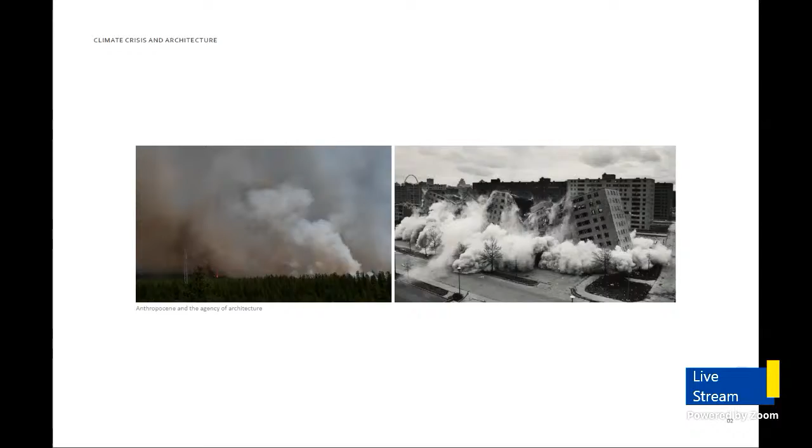The Anthropocene, as an acknowledged epoch, at last collectively identifies our responsibility towards the climate crisis. This thesis looks at architecture's complex relationship with nature, from romanticism, exploitation, separation, and energy conservation, to investigate the evolving human perception of nature and occupation of the natural world.

The 16th century development of Virgin American land by European settlers associated the city with a positive value. Nature represented the danger of the unknown, labeled as the chaotic wilderness. The following Age of Enlightenment characterized the rise of modern science, emphasizing the individual. It viewed the entire universe as a mechanism, resulting in the rise of capitalist globalization. At this time, nature was regarded as secondary, developing an exploitive relationship with it.

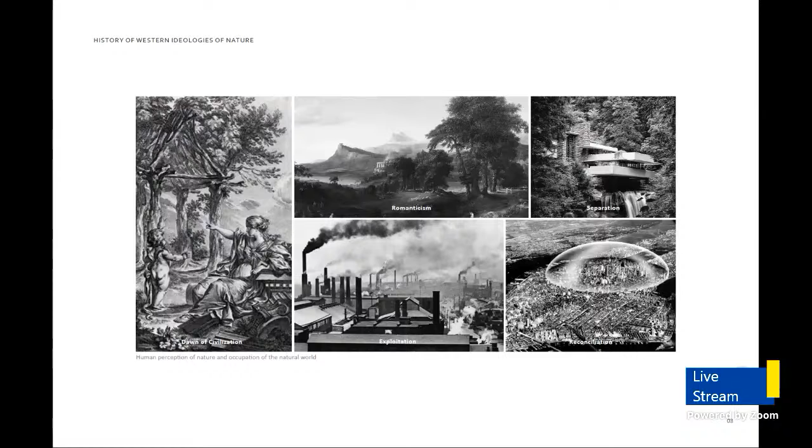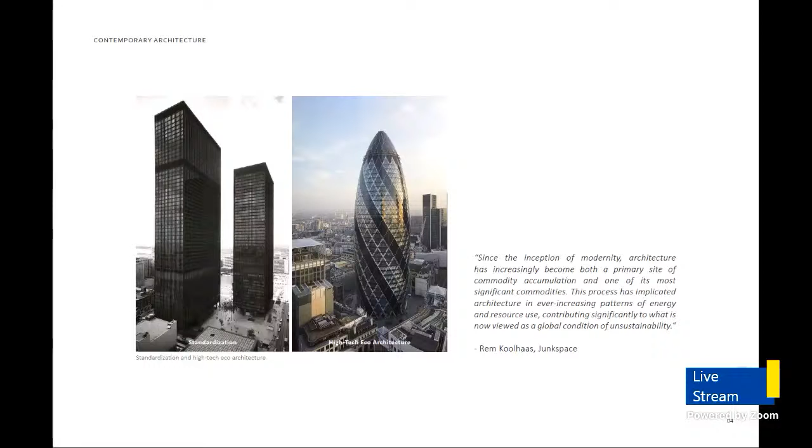In the 20th century, buildings became standardized and furthered the human separation from the natural environment by relying on mechanical systems and losing connection to nature-based concepts and local building practices. After the 1970s oil embargo, architecture shifted focus to the current discourse of sustainability based on performance energy. And while such buildings achieved performance energy reductions, their significant embodied carbon and use of high-end products makes them exclusive and unrealizable in the larger market.

In the 1970s, scientist James Lovelock proposed the revolutionary Gaia Hypothesis that viewed Earth and its biological systems as a huge single entity. The theory proposed a new way of understanding ecology, sparking conversations on coexistence with nature. Later, philosopher and environmentalist Timothy Morton defined the ecological thought as collective thinking, forcing us to invent ways of being together that don't depend on self-interest.

Researcher Kiel Moe brings this topic to the scale of architecture, stating that the act of building has influence beyond its physical boundaries, having social, political, and ecological ties elsewhere. As building impacts are vastly greater than performance energy, a hyper-ecological approach makes the energy and social exchanges an inherent consideration to achieve an ecologically ambitious approach to architecture.

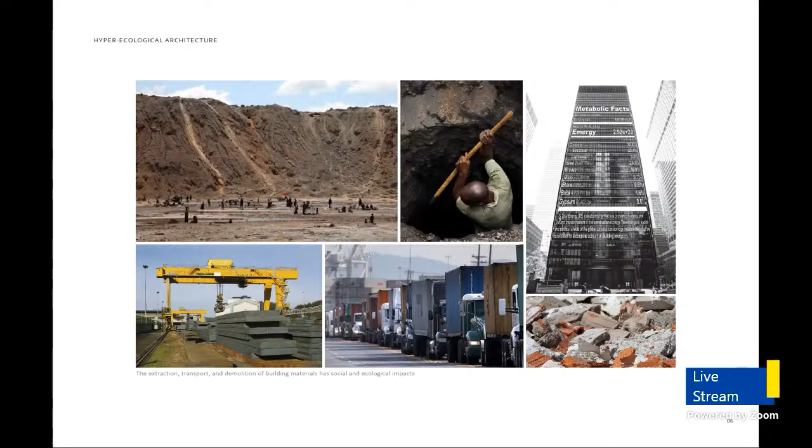The following case studies explore the interlinked energy and social exchanges through a blurred human-nature boundary of separation, the preservation of existing built structures, and considering the entire material life cycle. Through social exchanges, architecture has the ability to increase compassion towards the natural environment and generate a sense of interconnectedness through immersive experiences.

The Highline and OMA's proposal for Downsview Park create a social and cultural link between the public and ecology, embedding ecological topics into the urban fabric. Both projects also reclaim public lands through open and adaptable design, providing freedom of movement for both entities and encouraging engagement between the two within the urban context.

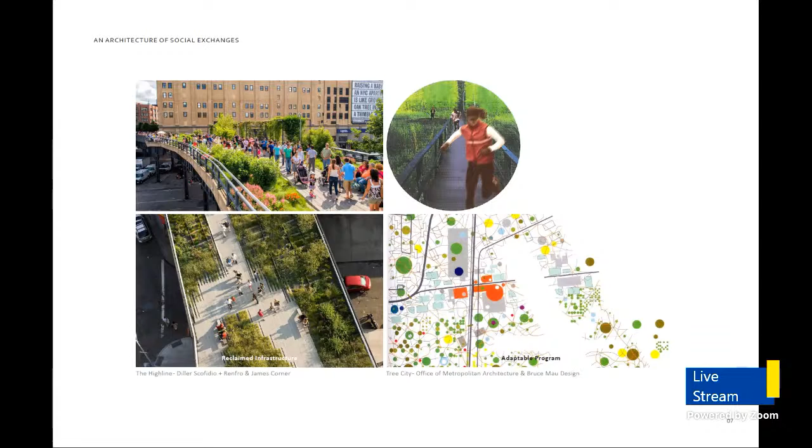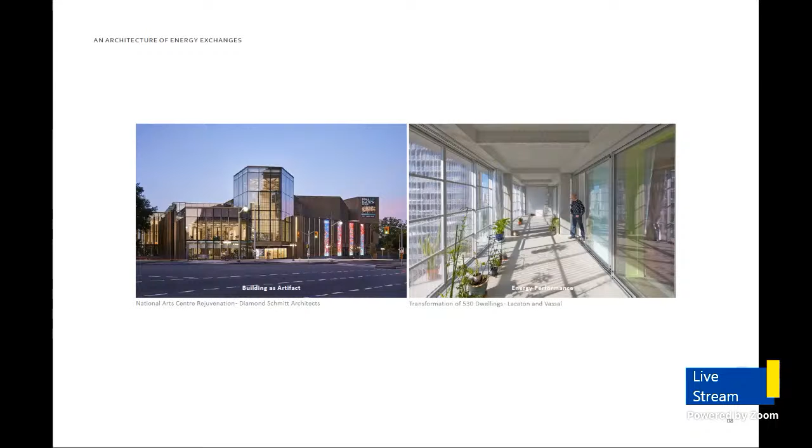A holistic understanding of energy exchanges views the built infrastructure as a material artifact open to adaptation. Through a layered intervention, the transformation of 530 dwellings by Lacaton and Vassal improves the comfort and energy performance of an existing building. The revitalization of the National Arts Center updates the building and reorients it to pedestrians and its neighborhood context. The projects exemplify how minimal interventions can radically change the usability and performance of an existing structure.

Energy exchanges also considers the life cycle of building materials and carbon sequestering biomaterials. The urban mining and recycling unit's design is formulated around the idea of temporary borrowing, using ethical materials that can be recycled, reused, or repurposed. Similarly, Stock Orchard Street House embraces low energy, easily accessible materials. These projects make energy exchanges an inherent consideration in the design, establishing an aesthetic by taking a moral standpoint.

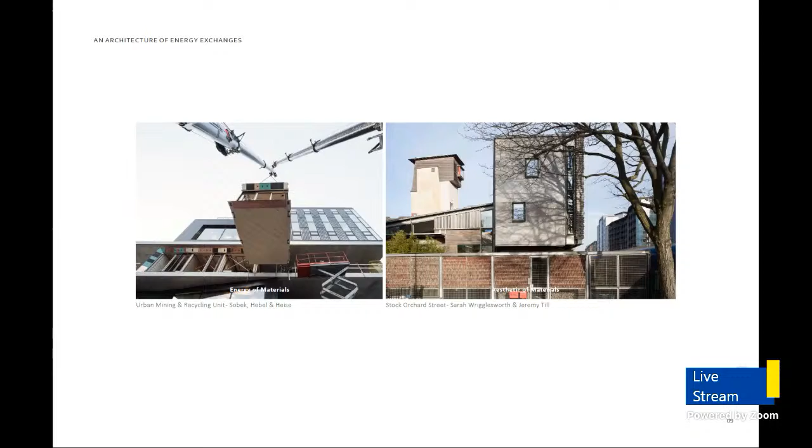The research informs that a more radical approach is necessary, one that first considers not to build, but to reclaim and reconnect. Built into the natural landscape and urban fabric of two tower-in-the-park neighborhoods, the 1960s Ontario Science Centre is an architectural icon by celebrated Japanese-Canadian architect Raymond Moriyama. Today, there have been talks of the center's demolition. A decline in visitors and the large amounts of energy required for its operation indicates a need to refresh its perspective to meet the new demands of the site.

This thesis takes the Brutalist Science Museum as a design exploration of how we might approach the act of design, from one of demolition and reconstruction to one that preserves and enhances the existing built and natural infrastructures.

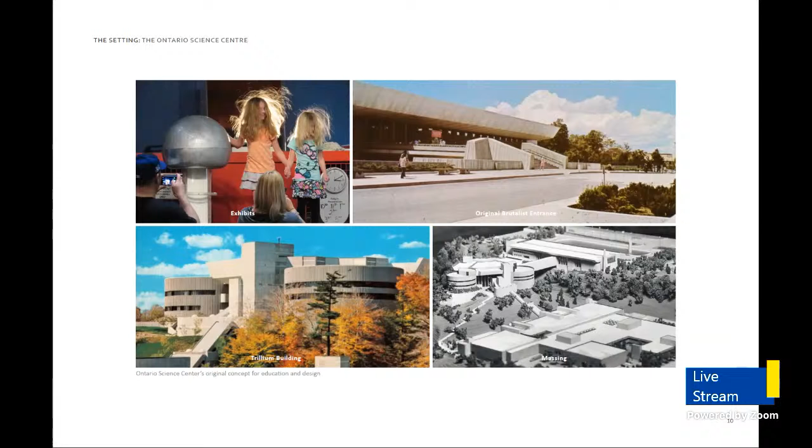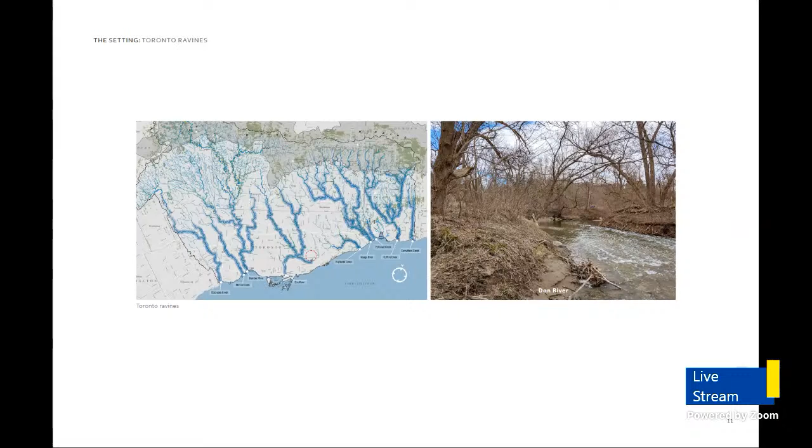The center is situated along the Don River, which plays a key role in the ecological health of the city. Toronto's ravine network is facing challenges due to expanding development that has led to excessive paved surfaces, causing floods and erosion of the riverbanks.

Not unlike the rest of the city, the site is experiencing rapid development of residential towers as a result of the Ontario Line and Eglinton transit connections proposed. Also, the growing interest of the public in green spaces post-COVID-19 pandemic presents an opportunity for the Ontario Science Centre to become a threshold into the recreational ravine landscape, educating the city and the site's adjacent Thorncliffe and Flemingdon Park residents on Toronto's ecology.

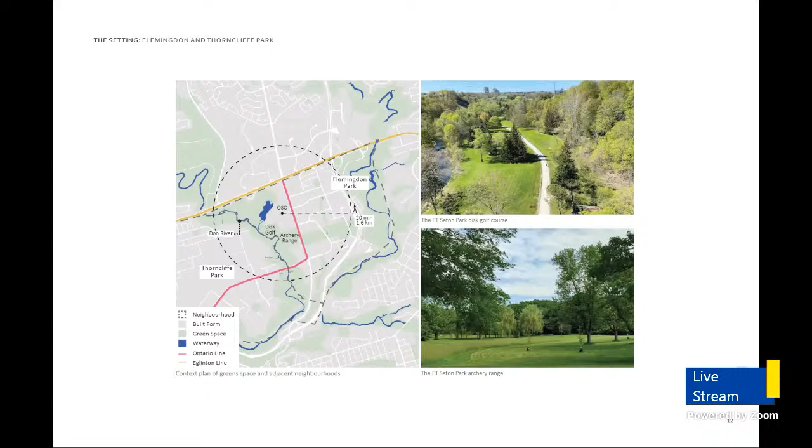The bordering neighborhoods originally aimed to counter suburban sprawl with the tower-in-the-park living concept for high-income residents in the Don Mills suburb. However, many of the original master plan's objectives were unrealized, and since then the area has become prominent for lower income residents and immigrant families that are often unfamiliar with the Canadian natural context.

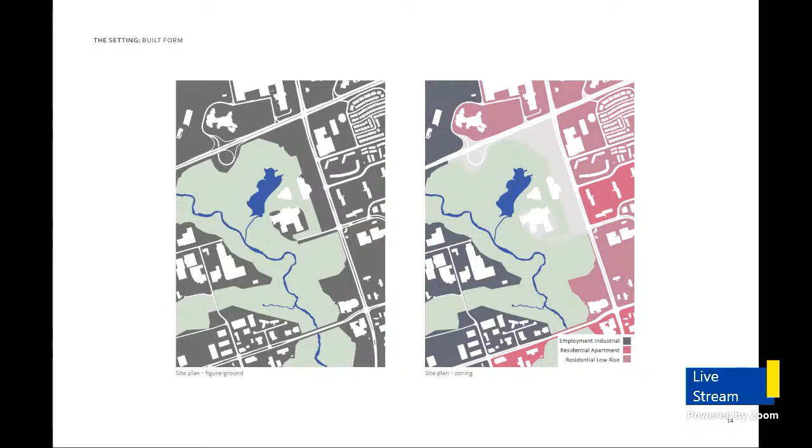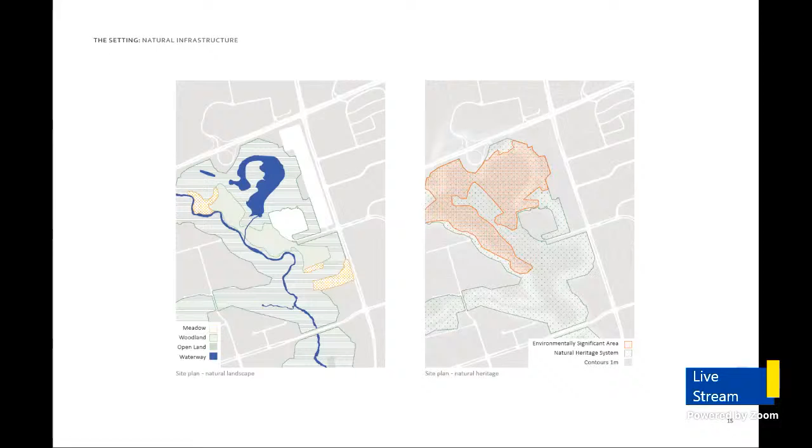Residential and employment industrial areas of the two neighborhoods border the ravine context. The site is part of a natural heritage system protected by the TRCA, and the wetland is identified as an environmentally significant area. Although the natural landscape is not fully accessible, its open land provides valuable recreational spaces for the community.

Busy vehicular streets are located to the north and east of the site, and a quiet ravine landscape borders the site from the south and west. In anticipation of the proposed densification and transit connections, the transformation supports the Flemingdon and Thorncliffe Park neighborhoods through a connected public lawn.

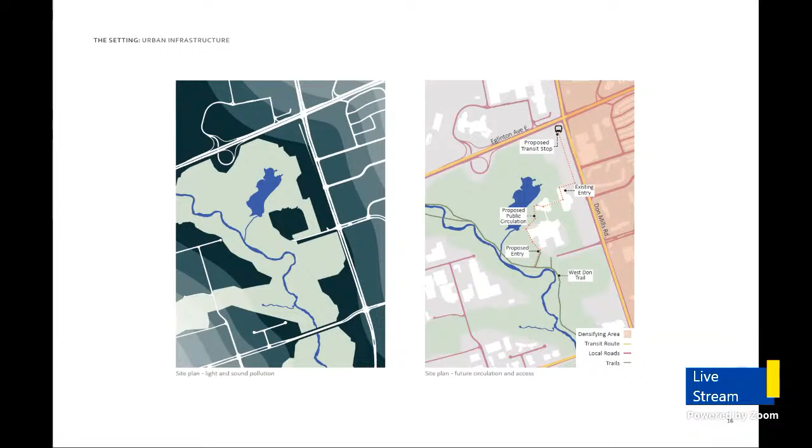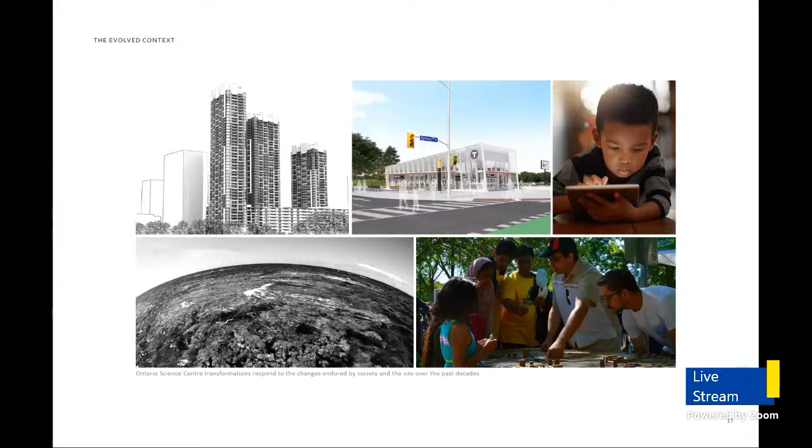The design proposal preserves the existing structure of the Science Center in response to the significant changes that the community and site have experienced since its conception. The transformation addresses the evolved relationship with science, technology, and nature for the 21st century that considers ecology as the master of science, along with the change of Thorncliffe and Flemingdon Park from high-end vehicle access areas to densifying lower-income immigrant neighborhoods with proposed transit connections. Lastly, the project views the architecture as adaptable rather than a fixed state, to meet the evolved context and continue to serve the community in the upcoming decades.

The site consists of an extensive parking lot and three massings, starting with the entry building that greets visitors. Connected by a bridge is the symbolic three-wing trillium flower building with a central open space. Lastly is the warehouse building that steps into the ravine with an escalator and is also surrounded by an extensive parking area.

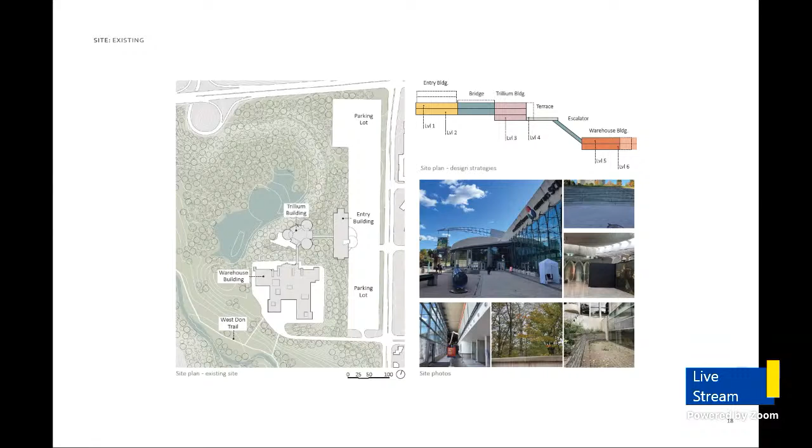The existing building plans are organized based on the experience of the building stepping into the ravine, so level 1 is the topmost floor of the entry building, and the levels increase as the building steps down. The site photos here show the building's fully renovated glass facade, the brutalist structure, some of the enclosed outdoor spaces, and the hardscaping around the building entrances.

The master plan envisions the site as a community hub and a living laboratory, hosting research, education, and social functions that strengthen the existing natural infrastructure of the site and maximize the use of the built infrastructure. The design reconsiders the following areas: the paved parking, the building facades, vacant rooftops, and building program. The transformation is achieved by exploring a set of design strategies relating to greening the site, improving the energy performance of the existing buildings, and providing community functions throughout.

To support the adjacent neighborhoods and prioritize the pedestrian experience, a continuous public path connecting the site is proposed to circulate the public without entering the ticketed buildings. This includes a layered outdoor bridge and stairways to the Trillium building and an existing stepped outdoor pathway to the warehouse building. The repositioning of the center's mandate, program, and architecture to integrate the project into its context and create a platform for education and awareness makes an example of how architecture can operate sympathetically within its environment.

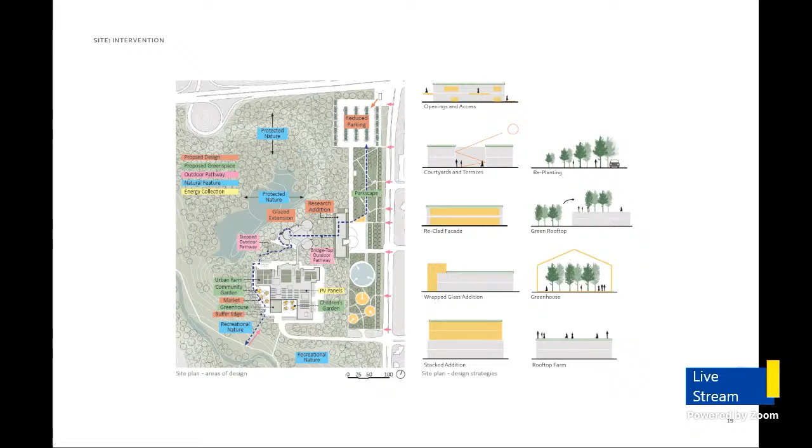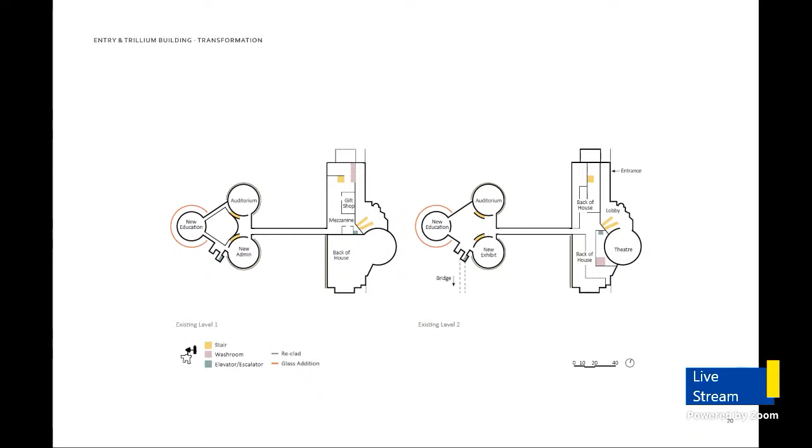The following drawings outline the program changes and envelope recladding of existing massings to insulate the building and update its functions. The entrance building will largely continue to host the same functions of greeting visitors. New exhibits on ecological challenges and opportunities of the 21st century replace the exhibits in the Trillium and warehouse building. In the Trillium building, a new education wing replaces the administration area with a glazed extension, taking advantage of the southwest-facing views and heat gains.

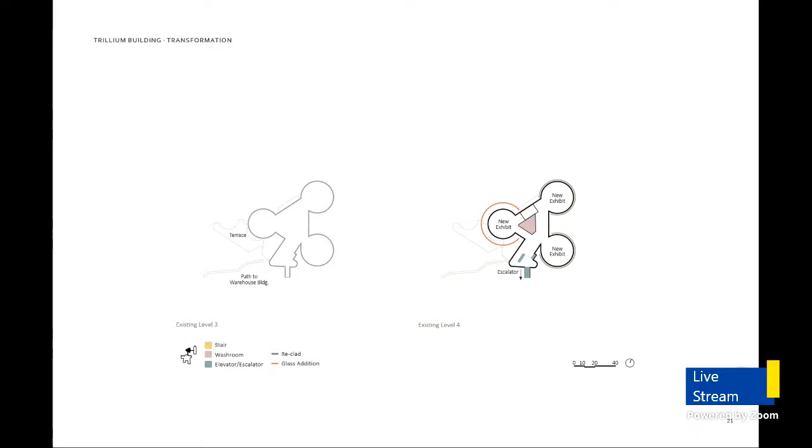Program additions of a greenhouse and market space in the warehouse building open the site up to community functions. For this presentation, I show the journey of visitors from the transit stop along Don Mills Road through the proposed building interventions to the West Don Trail. But visitors can also enter the site from the West Don Trail.

Where the pre-digital period required extensive paved parking areas, an ecological approach reconsiders the valuable land and transforms it to aid the watershed capacity of the site and create an extended public realm. The creation and maintenance of this parkscape strengthens the adjacent neighborhood's relationship with their natural environment and brings together ecological systems, the public, and researchers in a shared space.

To open the site up to pedestrians, the eastern edge of the parkscape against Don Mills Road is made more permeable with various points of entry. The parks program features ample open spaces which can be adapted to meet the changing needs of Thorncliffe and Flemingdon Park community.

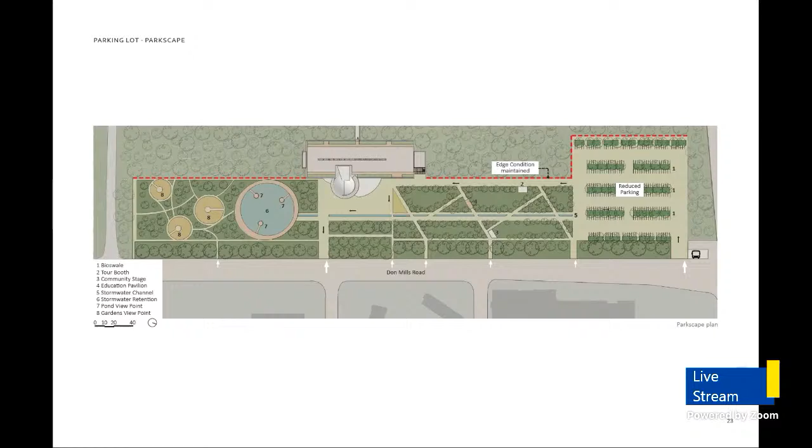The parkscape acknowledges that it is reconstructed nature rather than a return to an idealized pre-development ecology. For this reason, the boundary between the at-risk landscape and the parkscape for community engagement is maintained. The boundary edge between the parkscape and Don Mills Road is planted with a row of woodlands to create an expanded buffer zone. The experience of the site begins at the north of the parking lot for transit and car users.

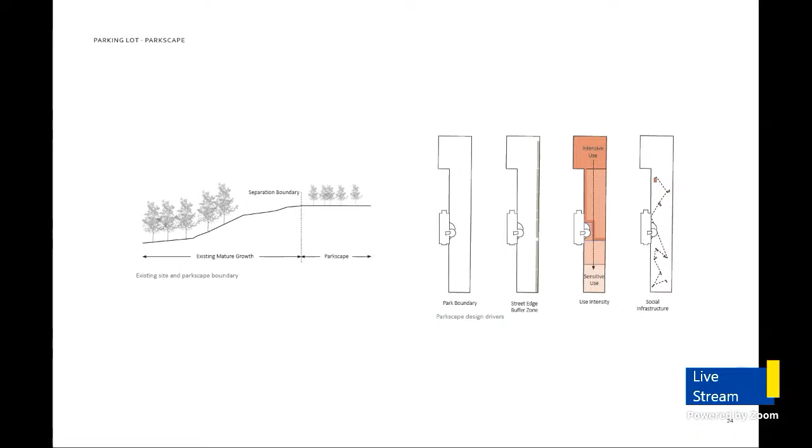As visitors continue their journey south of the site, the parkscape is programmed with increasingly sensitive landscapes. Social infrastructure guides visitors through the site and fosters community and learning throughout the parkscape.

The parkscape reintroduces landscapes that are native to the site, such as open land, mixed woods, waterways, meadows, and gardens. Unlike the ravine landscape, these are spaces visitors can experience up close. Various pedestrian paths are introduced to connect the site from east to west, and an activity trail is located along the perimeter of the park.

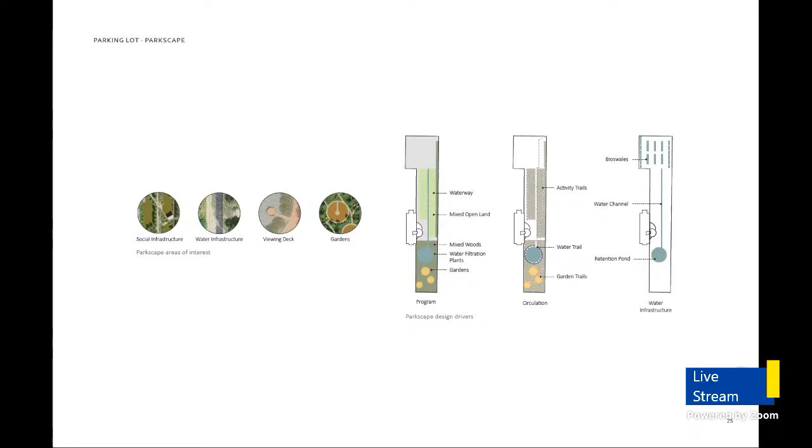Additionally, experiential water and garden trails provide program-specific experiences, and water infrastructure leads water to a retention pond with plants for filtering the pollutants. Social infrastructure such as the community stage and viewpoints shown here allow the community to reclaim the public land and learn about environmentally protective strategies such as regeneration and stormwater management.

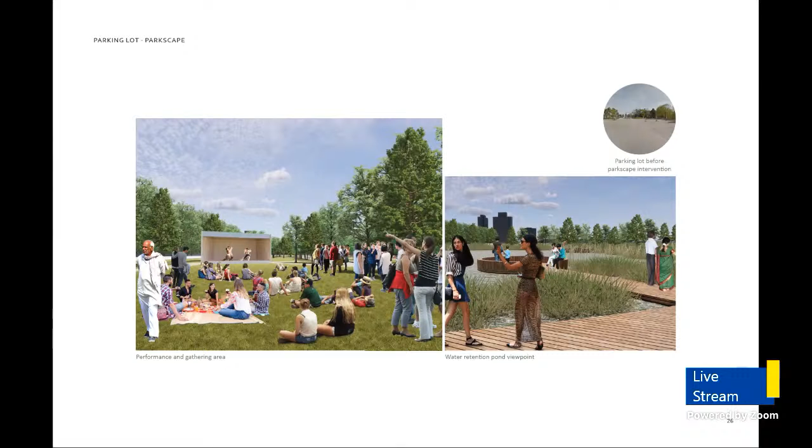Moving to the entrance of the building, a two-story stacked addition on the entry massing introduces research programming and integrates the neighborhood residents into a mixed-use space facilitating social exchanges. Through the consideration of energy, the addition incorporates natural and repurposed materials to minimize embodied energy and increase carbon sequestration of the site.

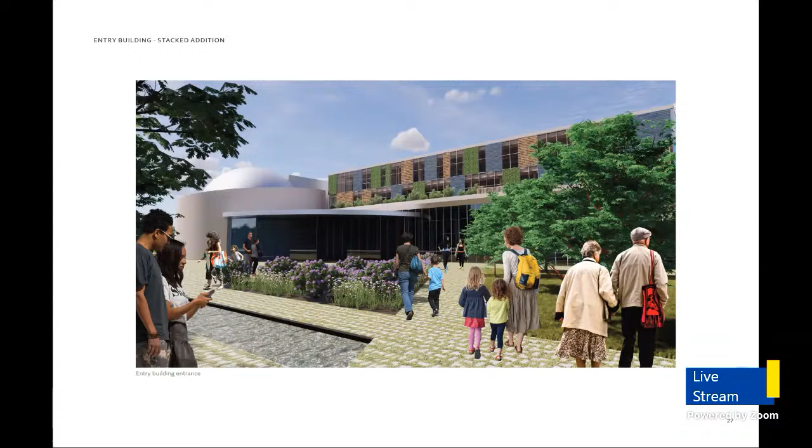The first floor includes a cafeteria, a circular kitchen, lounge, meeting rooms, bookable offices, some classrooms, and also a larger lecture space, all organized around a linear atrium. The addition's open and collaborative atmosphere provides a platform for social exchanges, featuring experimental materials throughout.

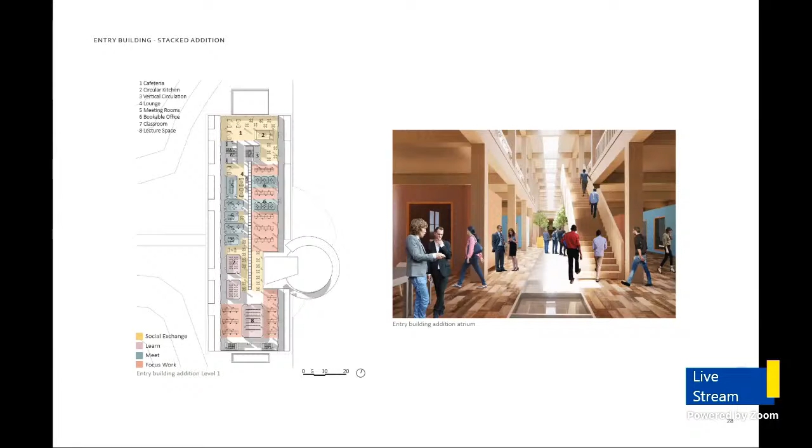The second floor continues the central circulation and hosts labs for researchers and students, along with some work and lounge areas. This floor also has a large unprogrammed space that can be used for events and large gatherings, or can be further partitioned off.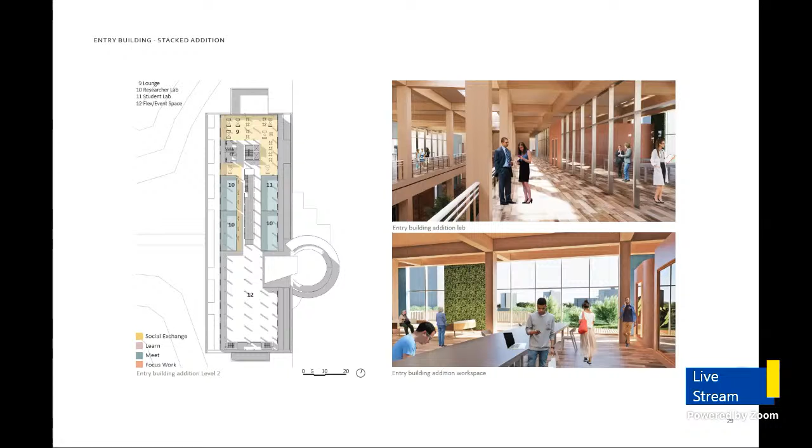The structure, vertical circulation, skylight, and glass floor take cues from the existing building below, with a supplementary entrance separate from the existing center. The addition's structure accommodates a variety and flexibility of uses, allowing the space to adapt to meet the user's requirements.

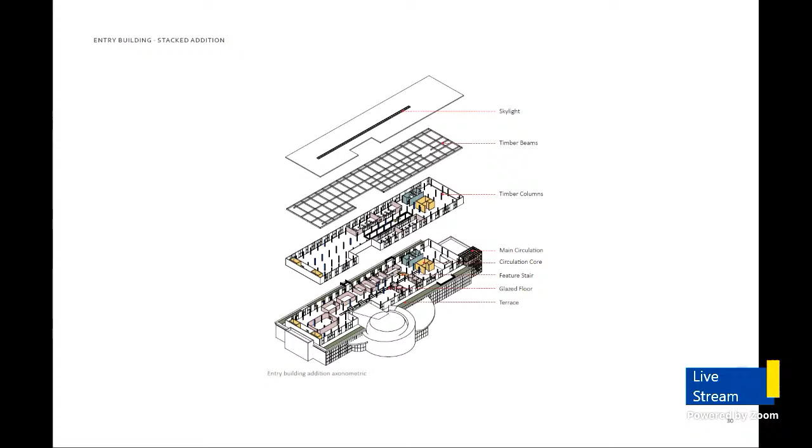The existing concrete roof overhangs are converted into an open terrace for this addition, where users can view the parkscape and interact with the facade's tactile celebration of materials. The terrace connects to the public circulation path, leading visitors to the Trillium building rooftop through an outdoor bridge pathway that provides views of the surrounding context.

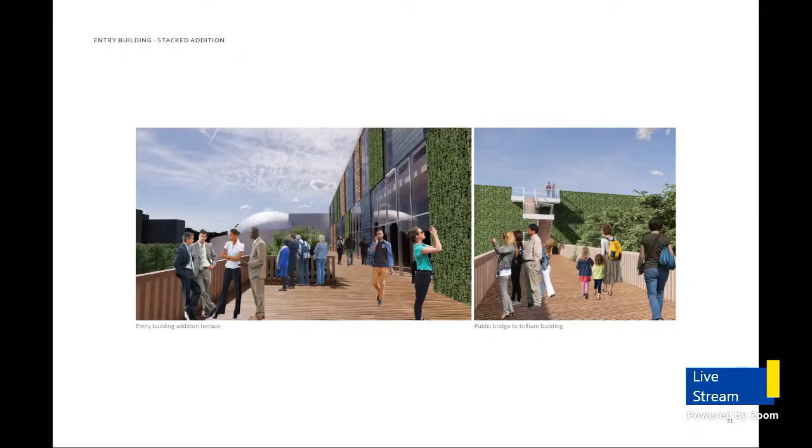At the Trillium building, its energy performance is enhanced by layering the southwest wing with a glazed envelope to moderate the temperature of the concrete mass and increase the building's energy efficiency. Timber is used to achieve the grand space and highlight the structural capabilities of the biomaterial.

The extension converts the inward-looking area into a light-filled space with unique views of the wetland and ravine, especially from the height of the second-story mezzanine. Located along the public circulation route, the extension provides visitors with a break from their journey through the site with a cafe and seating space.

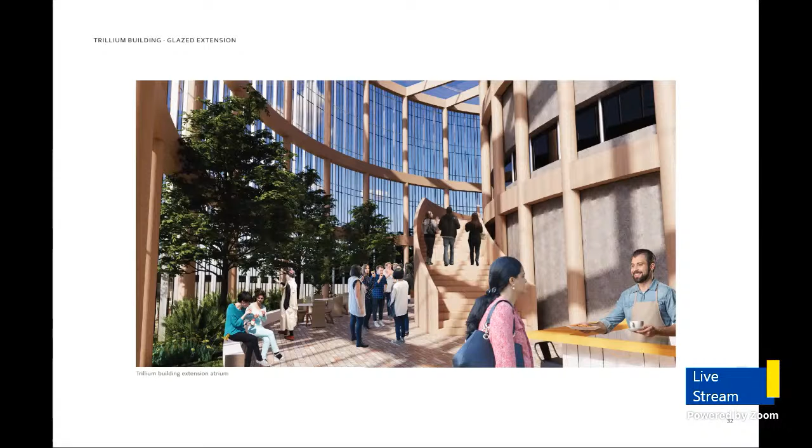Programmed to incorporate community uses, the space creates a feeling of interconnectedness within a social atmosphere. Similar to the entry building addition, the area is flexible in its design and can be converted to serve different functions such as a study, gallery, event space, and so forth.

The atrium extends onto the existing Trillium building terrace, where visitors will arrive from the circulation path. From the terrace, an outdoor pathway leads visitors to the warehouse building.

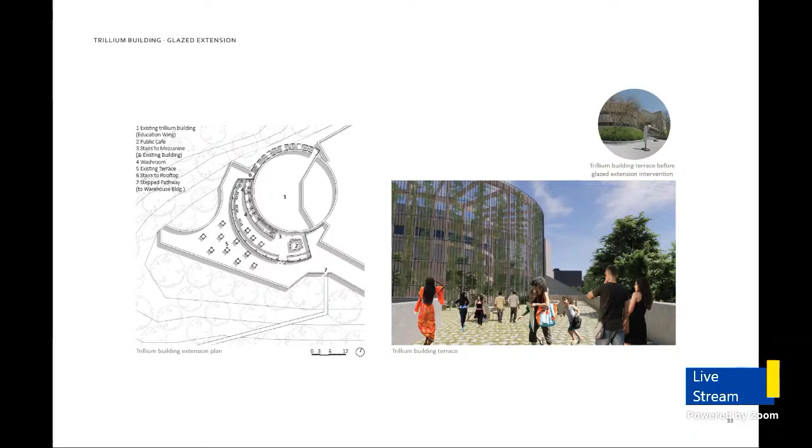The vacant rooftop of the warehouse building is converted into an urban farm, opening it up to the community. Greening the rooftop provides ecological advantages in addition to growing functions that benefit the adjacent neighborhoods.

A greenhouse replaces a southwest-facing loading zone of the warehouse building, and solar panels are introduced on parts of the roof to generate renewable energy on site for the future operation of the center.

Furthering the thinking of energy flows, a zero-pollution growing system can become an educational experience where visitors can learn about waste reuse and reducing energy and water use through circular practices.

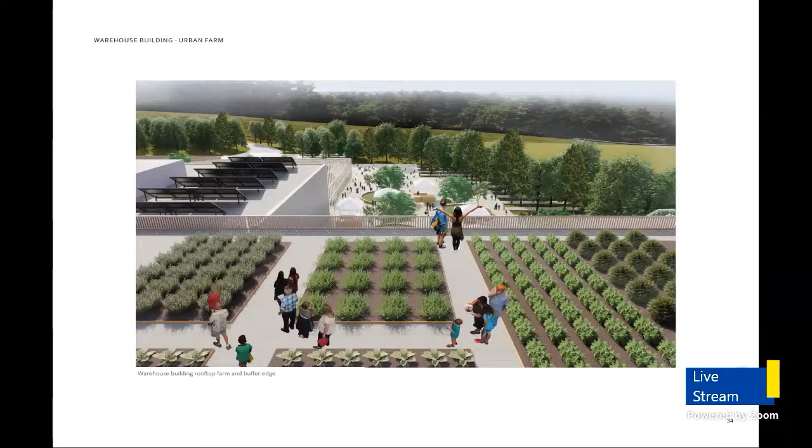Urban farming cultivates neighborhood development through gathering and community engagement. The participatory programming increases the public's understanding of the reduction of natural resource consumption, creating a valuable opportunity for social exchanges.

The urban farm supports the circular restaurant kitchen and the entry building addition, and program modifications introduce a market space within and in the paved areas of the warehouse building.

The paved area, which is now with porous pavers, is transformed into community gardens and temporary markets in the summer months, where visitors can purchase locally grown produce cultivated on site. The urban farm and its market areas activate the space and open up the center to the community.

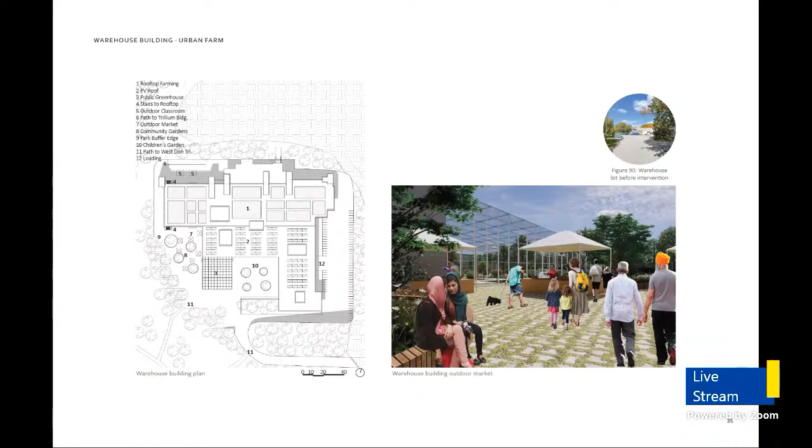The transformation extracts the hidden potential of the existing built, social, and natural infrastructure to enhance the role of the Ontario Science Centre. It considers the embodied energy of the building and site in all its forms, arguing for the conservation of the Brutalist landmark.

The proposal works with found architecture and underutilized land to create a platform where elements of nature, people, and material are brought together in one communal space, choreographing social exchanges.

The intervention updates the building and site's use, performance, and access, illustrating how the existing built infrastructure can be integrated into the social fabric of a place to support communities and ecological systems, activate the site, and catalyze future growth.

In conclusion, the thesis suggests that there is no one single solution representing what a hyper-ecological architecture is. Rather, an interdependent collection of forward-thinking ideas can empower the shifting paradigm.

The project provides a prototype for the Ecocene and becomes a didactic demonstration of how architectural interventions can accommodate the needs of the community and ecology to shift towards an Ecocene. Thank you.

Thank you. Thank you, Rutuja.

Great presentation. Before we move to formal discussion, is there any clarification questions that anybody would like to ask the candidate?

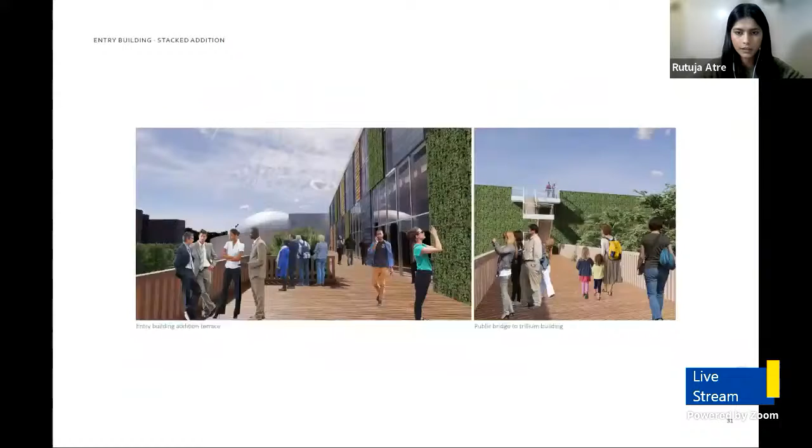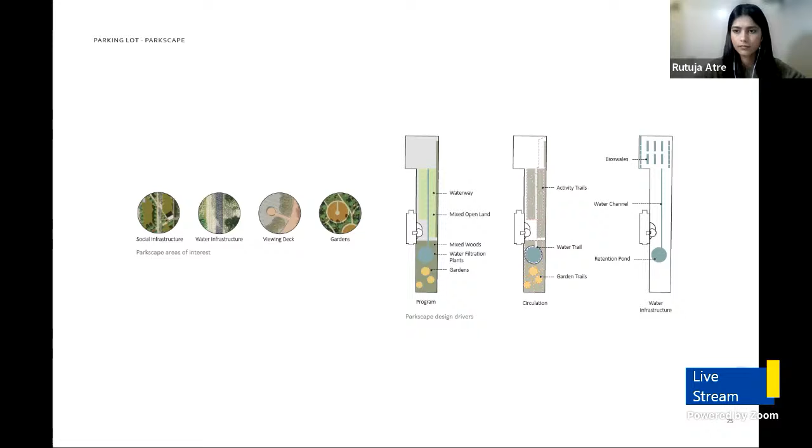And can I ask one more question? Yeah, of course. Yeah, absolutely.

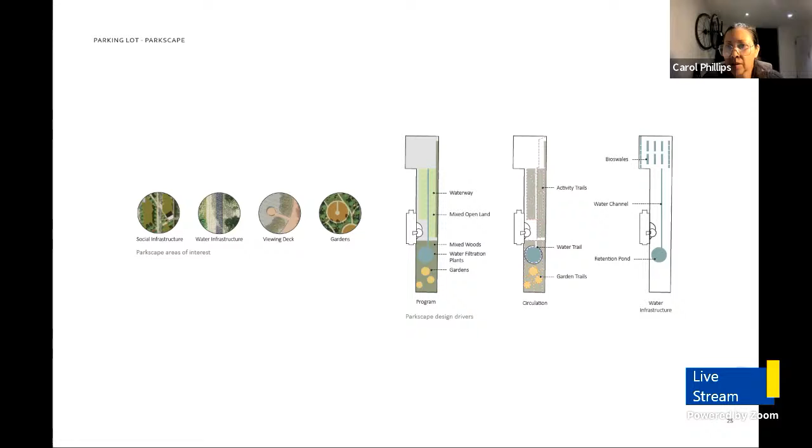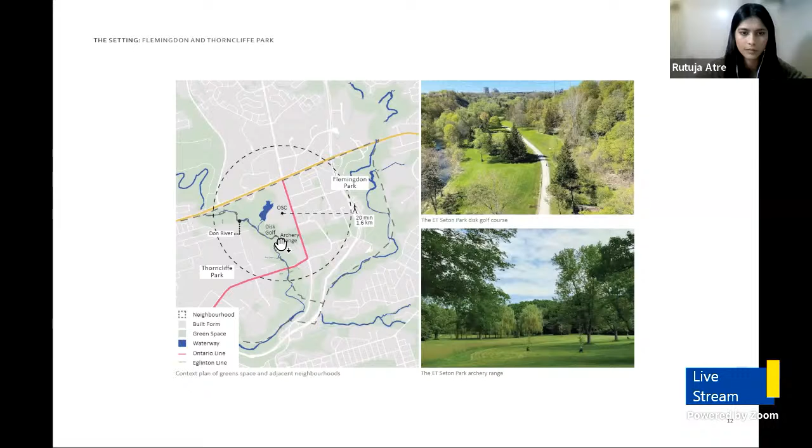Moving closer to take a look at it, it largely consists of woodlands around the space with some open land, which the community is currently using for archery and other recreational aspects. The waterway is one of the areas of the Don River that leads to this water retention pond. Well, it's not really retention, it's a waterway, and it collects there into kind of this swamp-like area. There's also the woodlands I mentioned and meadows on the site, which are all part of a natural heritage system.

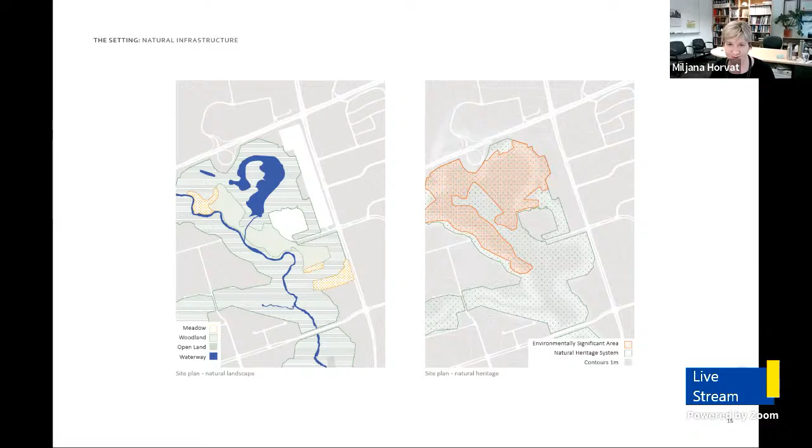Another guest, Marc, Ryan, do you have clarification questions, or we can just kind of get into it? I did just want to ask for clarification.

Maybe I missed it, but could you talk a little bit about the starting point for the conversion of use? Is this a scenario where you've made a hypothesis that the science center is evacuated, is on a new site, or has relocated, and this is a kind of substitution of programming, or does this layer on with the science center? Just to clarify my understanding, what's the vision here?

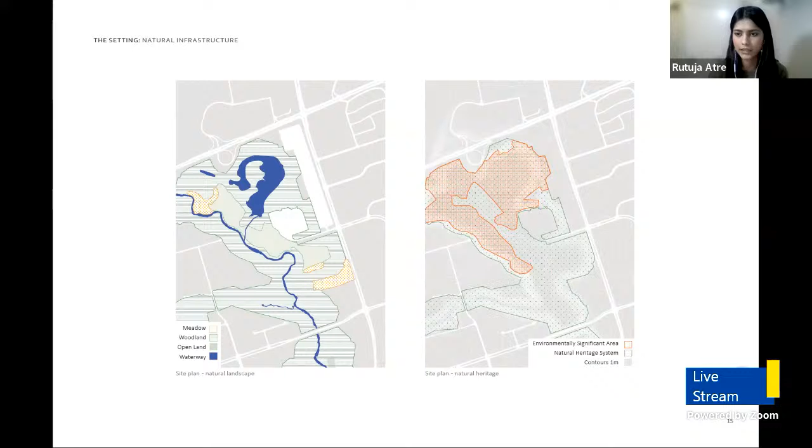Yeah, the vision is that it layers with the science center. The science center will be able to continue its operation within the buildings that it currently has. And then the vision is that there are additional uses proposed, such as the public incorporated onto the site and researchers, to enliven essentially the space and use the existing built infrastructure to its advantage.

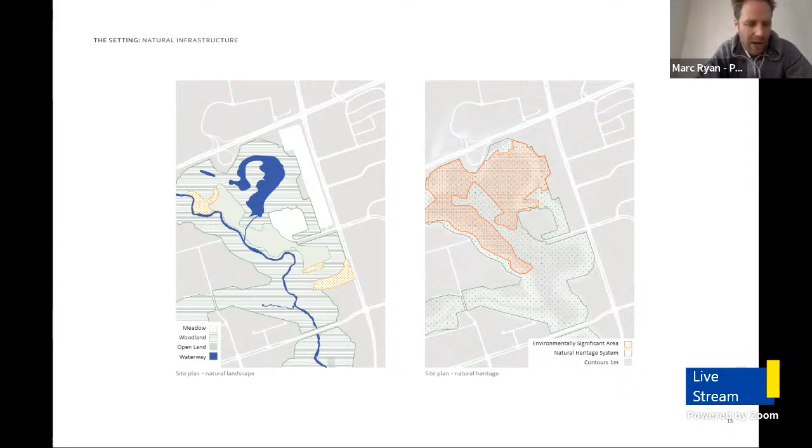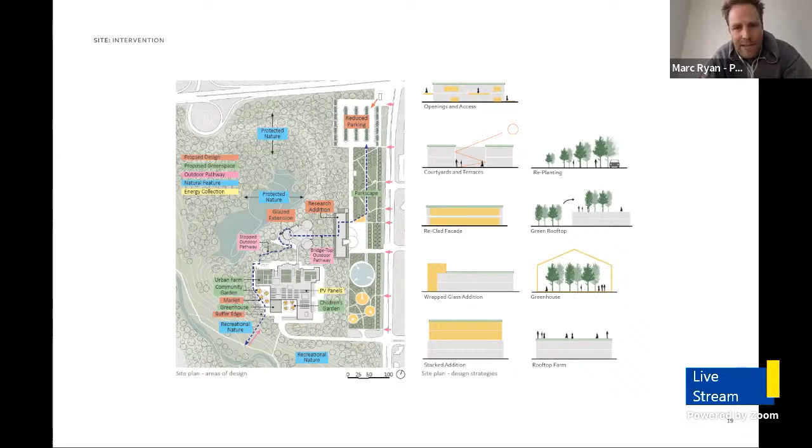Do you have a sense of what's displaced or what's kept? I saw a lot of new floor plans, and it looks like a lot of things that we would have understood in the science center are undone. But it's interesting, there's a blend. Could you just talk a bit about whether you're consolidating some of the science center education, or does that still remain mixed?

The education and pretty much the aspects of the Science Center would continue their operation within the existing buildings. So a lot of the functions they have in the Trillium and Warehouse building are their exhibition spaces. And the proposal here is to update those exhibitions to reflect more on ecology rather than these kind of displays that have been updated over the years, but they're more digital focused, and we wanted to shift the thinking towards the Ecocene and more ecological topics. But essentially the functions in the building are the same.

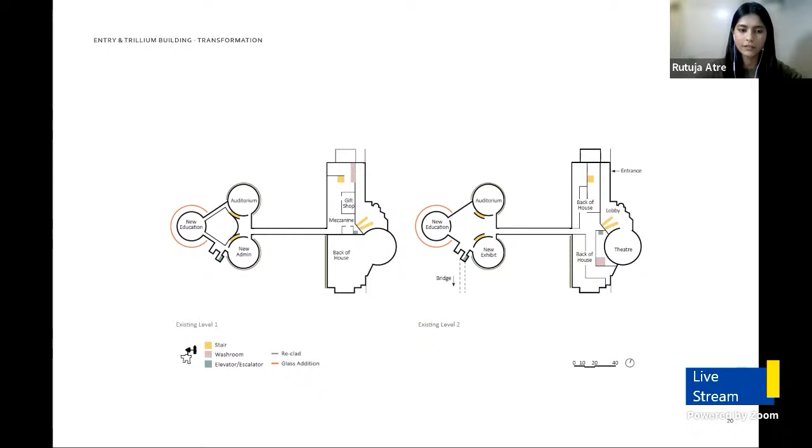The entry building will greet visitors. The Trillium building has its administration and auditorium functions. The education wing is now closest to the views. And then moving to the warehouse building, it generally had exhibition spaces and some support areas, which remain the same. The new exhibits are replacing the old ones with a new market area that steps out into the paved spaces to support the urban farm.

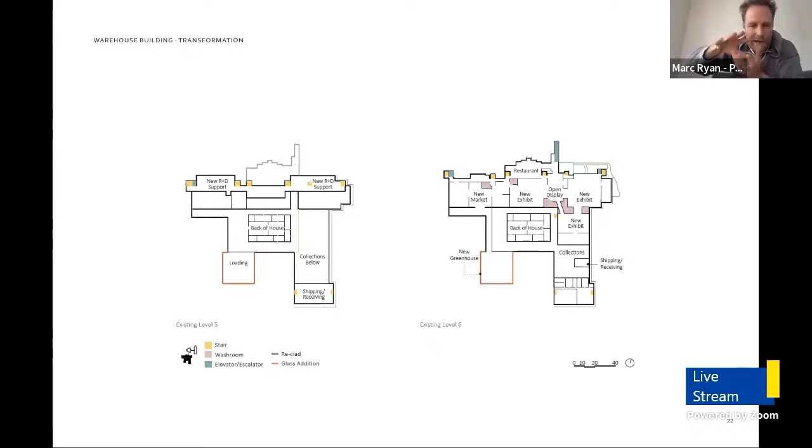There are some beautiful moments in the plan and in the sequence, but I'd love for you to keep thinking experientially, both inside and outside the building, about what it means to go from community to street to this linear park, to enter a door and go through, and how the inside-outside relationship gets played out a bit more in every part of your building—how ultimately do you leave the building at the base of the river valley, and then are you into the park system?

Like the idea that this is a very different way of breathing in and out—I'd love for your project to explore that. And the other thing about the Brutalist Legacy, which you talk about a bit: I noticed the renovations of the Science Center, maybe Carol will speak to this, but some of the renovations seem to cover up the Brutalist Legacy already. I was interested in how some of your claddings and things sort of also were trying to cover things. I was curious about the ethos of that, because I like how you referred to adaptability rather than the fixed—how do you adapt and embed this brutalist, carbon-intensive mass of concrete, and allow that to live again?

I was just interested—is there some stripping back that would actually have been interesting, to reveal that, because we almost don't see much of that concrete work that was so beautiful in its day. These are again our questions of how you work with this, because I think the building is such an interesting emblem. So how do you work with the iconography of brutalism and then the Ecocene, and that tension—even that could somehow be very exciting.

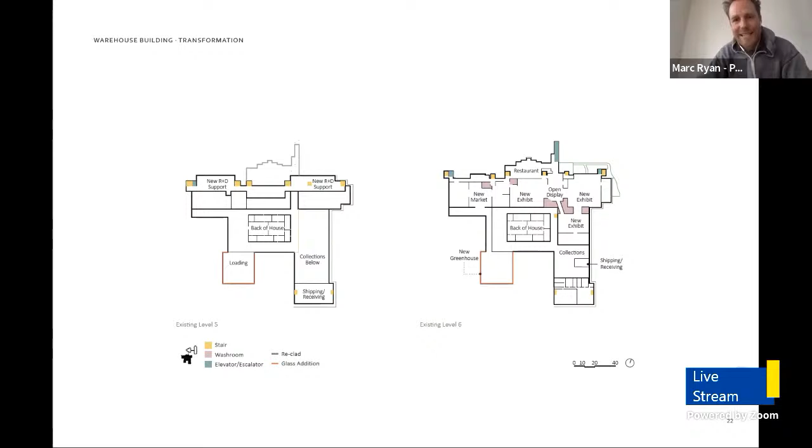And that might also help make a statement about why it's better to not have this parking lot. Incidentally, I think you should go all in on the change of use from parking, that little bit of reduced parking right at the doorstep of the subway stop. I think you want that landing out of transit to be a dream, like you've arrived. So find a way to get the workers' cars, decommission those cars, find another spot on your site plan for those. Just that welcome and that trajectory begins when you leave that station.

Anyway, I'm going to let others talk because I don't have a sense of timing right now, but hey, lots of really great work and congratulations.

Yeah, thank you, Marc. Well, I don't know if there's anything to respond here by Rutuja, because I see she's taking notes diligently. But yeah, thanks so much for all your comments. I think the comment on thresholds is extremely important with circulation and the community members. I think that could be interesting to look at in further detail too.

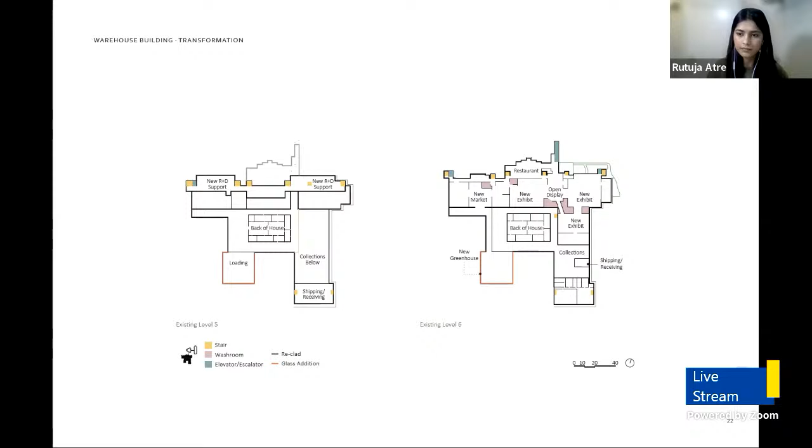Thank you. Carol, would you like to continue? Sure, thank you. Marc has brought up a lot of topics that actually cover a lot of the things that I was thinking about as well.

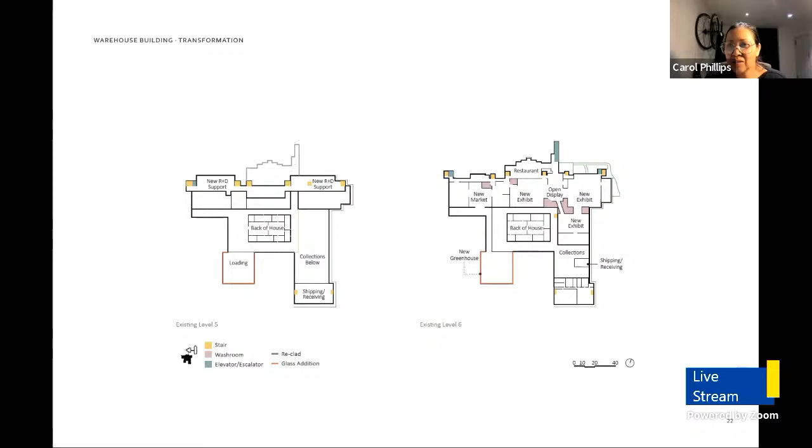But first of all, I wanted to say congratulations, Rutuja. I wish you could have left that aerial up a little longer for us to luxuriate on, because it's a lovely drawing.

I think in some ways it captures the spirit of the project, which is trying to figure out how we nestle into this landscape and how we readapt. Congratulations on taking this on in a very sensitive way. These are all topics that we as architects and landscape architects have to embrace, about how we work with natural systems, how we embrace what is there, adaptively reuse it, and think really hard about what to take away and what to add to.

I think that's where the thesis is. It's a very strong thesis, and like all strong thesis projects, there are many other avenues you can actually branch off from here, or areas of concentration.

If I was to comment on some of the things Marc brought up as well, I would even encourage you to be bigger, and to think of this, in some ways, like en route to an ecocene, you kind of have to go through the ecotone. You have to go through the liminal space of an ecotone, which is between two distinct landscapes.